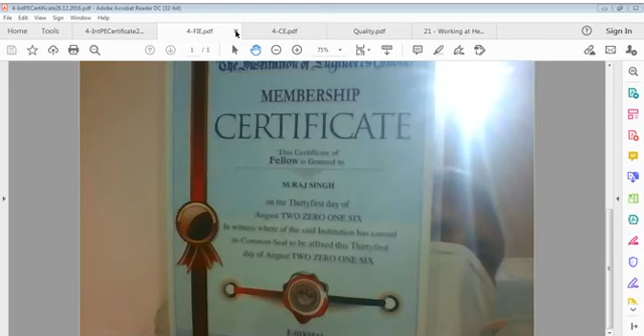Services delivered by that professional, or work done by that professional, must be professional, must be expert, must be reliable. That is a very important point. And what we actually expect from that professional is quality system, quality work.

Quality system and quality work are both related, because without system establishment, quality cannot be achieved, and without achieving quality, we cannot justify any system, we cannot justify any product. If a product lies short of quality, this means something wrong exists somewhere in the system we are working with, and this is a very serious matter.

Quality should be an integral part of product or services. This cannot be - quality cannot be isolated from the structure of the product, from the finishes of the product, from the processing of the product. Every stage of product delivery should be quality oriented.

That is the first requirement. During the process of manufacturing or construction, the product should be produced in an atmosphere, in an environment, that should be safety related - very much safe on its own, for its people, for health of the system, for health of workers, and for keeping the environment good, attractive, pro public, pro people.

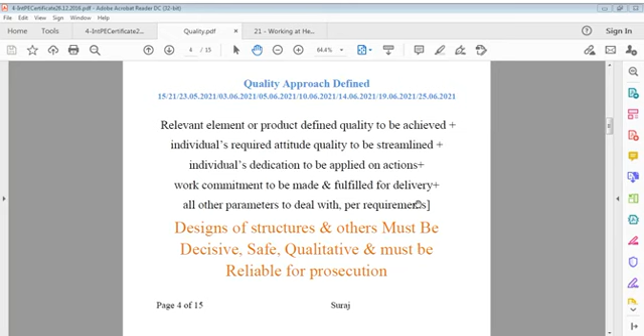A car which should work for at least 10 years - those products, if we worry about them, why don't we worry about those products which have to work for 50 to 100 years? That's the point here. Without quality, or can say without inbuilt quality into that product, you cannot say that it's going to last. So that's a very big question, a very big question. This must be considered by the engineering world and by the public.

You are going to spend millions and millions on your building, and you are not asking any question. It's really strange, and those manufacturers or promoters know it very well. They shall not raise this question because you are in need of a house and they are in need of money. That's it, this is the relation. Does your relation exist between money and your need, or do you spend money for a quality product? Or are you also interested in making business only, in doing business with them - buying this house or building and then disposing of it later on after making double profit.

Means market demand changes quality. If there's more demand, you shall change quality. No, it can't be accepted. Quality has to be maintained at required level. You cannot say, oh demand is more, I just made it very rapidly and you did not get that much quality. That's not reasonable. That cannot be accepted.

If you want to raise your production level, you have to raise resources. You cannot force your workers to work 20 hours or 18 hours a day. Maximum industrial standards don't allow more than 10 hours — 8 hours plus 2 hours overtime. In rare cases it can be more, but it's human that works, and machines also require maintenance, so continuous work is not possible. If you want to enhance your business and quantity, you have to raise the level of your resources. That's very clear.

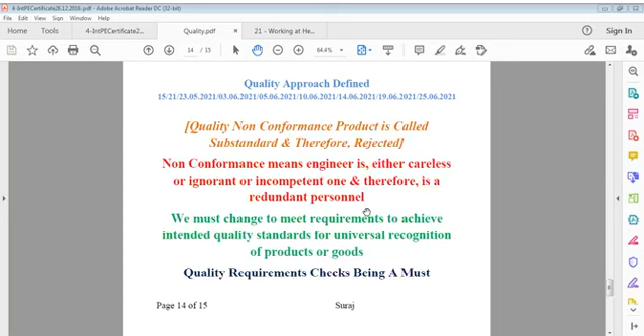Missing all this, we have to blame ourselves for quality failure. Reliability, though it's also some form of quality, is the quality of every act, of every sequence. The sum of that is reliability.

What level of reliability, what level of quality, what level of input — all of this can be defined, and quality means compliance to that requirement. It doesn't mean you bring stars from the sky or the sun or moon and say this is quality. Nobody shall demand gold if the requirement is iron. Whatever is required, requirement is design. The designer specifies what is required — it may be design specification, work specification, or material specification. Which material you have to use is most important, but use of material alone is not enough. How we have to use it, what factors to consider — all this counts in design.

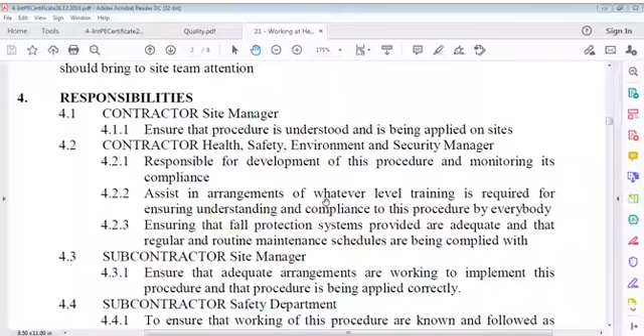We defined the scope, and talked on definitions of this requirement. Then we can see that we define various other positions — what they have to do on site or otherwise — and then we worked on the responsibilities. Then, because in heights there are so many hazards involved, working at heights, we talked of that.

We are somewhere, I think,

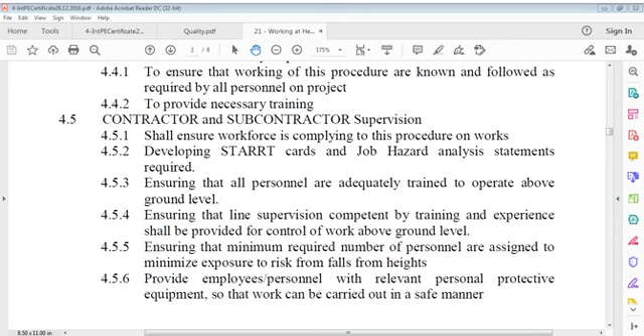Shall ensure work with subcontractor supervision, shall ensure workforce is complying to this procedure on works, developing STARRT cards and job hazard analysis or assessment statements required like that. Job hazard analysis, you know very well, and STARRT, this is safety task analysis, risk review technique, which is done in the beginning of activity.

And the card is given to everybody who can understand, particularly in mechanical and electrical, but it's also done in civil analysis, ensuring all personnel are adequately trained to operate above ground levels. They must be trained, and ensuring that line supervision competent by training and experience shall be provided for control of work above ground level. Ensuring the minimum required number of personnel are assigned to minimize exposure to risk from fall from height, because everybody cannot be allowed for that until one is well trained.

Provide employees personnel with relevant personal protective equipment so that work can be carried out in a safe manner. And ensuring edge protection is provided at possible locations where personnel could be susceptible to falls when working at height more than

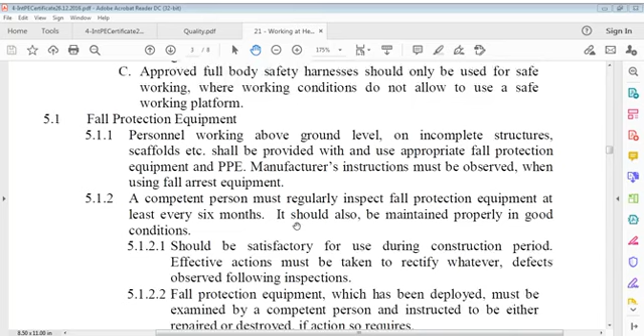And then fall protection equipment, which can say personnel working above ground level on incomplete structures, scaffolds, etc., shall be provided with and use appropriate fall protection. These points we have to be very careful about.

Well, I think last time working at, let me see if I can do it. I can find that. Yeah, there was some point, I think some file I retrieved from that. Last time we used this file for explanation.

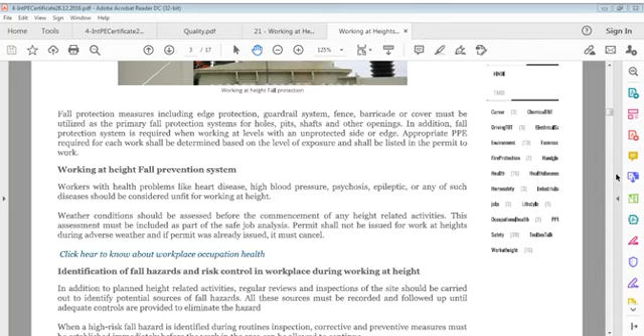Working at height, what was, and you can see these OSHA issues we talked of. Working at height procedure requirement we talked of, and then working at height fall prevention system, and we talked of identification of fall hazards and risk control in workplace.

Identification of fall hazards, I say, let me just blow it up further so that everybody can see it. Identification of fall hazards, risk control in workplace during working at height.

Working at height fall protection equipment we talked of: guardrail system, warning line system, safety full body harness, anchorage, connections and lifeline, and self-retracting lifeline, shock absorber, snap hook.

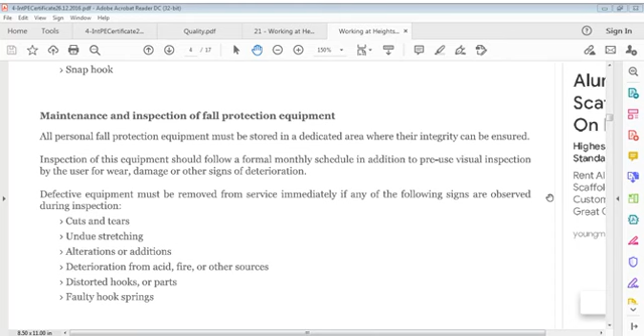Maintenance and inspection of fall protection equipment, like all personal fall protection equipment must be stored in a dedicated area where their integrity can be ensured. Inspection of this equipment should follow a formal monthly schedule in addition to pre-use visual inspections by the user for wear, damage, or other signs of deterioration, and defective equipment must be removed from service immediately if any of the following signs are observed, like cuts and tears, undue stretching, alteration, additions, deterioration from acid, fire or other sources, distorted hooks.

Likewise, this is how to keep this elevation safe, so that people should not fall. You can see this here. All these are the prevention of falls.

This is how many meters from here, from this level. And another one here for guardrail, like this guardrail and toe rail, toe guard. Likewise, it can be said that then you can say working at height guardrail systems. Permanent guardrails are often constructed as part of stairways.

We use them in homes, we call them railing here, and they are often constructed as part of stairways, landings, work platforms, and equipment access platforms.

Where short-term fall hazards exist, temporary guardrails are used. So we can say then working at heights, toolbox talks and warning monitors. Working at temporary warning - we should understand this point, meaning what is temporary warning and what is that?

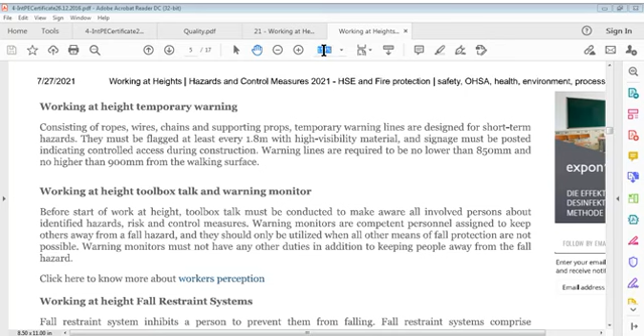Working at height, temporary warning consisting of ropes, wires, chains, and supporting props. Temporary warning lines are designed for short-term hazards. They must be flagged at least every 1.8 meters with high visibility material, and signage must be posted indicating controlled access during construction. Warning lines are required to be no lower than 850mm and no higher than 900mm from the walking surface. This is warning lines, so what is that?

Working at height, temporary warning consisting of ropes, wires, chains and supporting props. Temporary warning lines are designed for short-term hazards. They must be flagged every 1.8 meters with high visibility material, and signage must be posted indicating controlled access during construction. Warning lines are required to be no lower than 850mm and no higher than 900mm from the walking surface. Working at height, toolbox talk and warning monitor.

Before start of work at height, toolbox talks must be conducted to make all involved persons aware about identified hazards, risks and control measures. Warning monitors are competent personnel assigned to keep others away from fall hazards, and they should only be utilized when all other means of fall protection are not possible. Warning monitors must not have any other duty in addition to keeping people away from fall hazards. Then we have working at height fall restraint system.

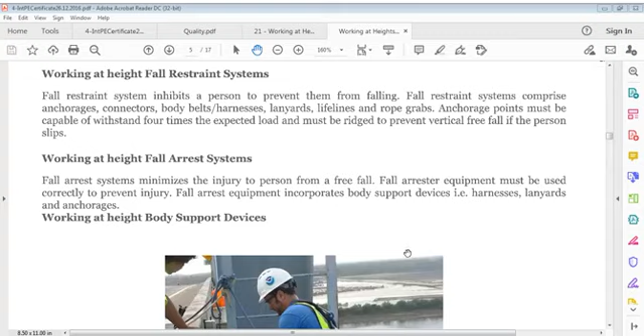Working at height fall arrest system we have - likewise, you can say we discuss all this. And we have working at height lanyards we talked of, lanyard hooks. First of this we go see this one. This is, you can say, it says there's a time limit also.

Let's say even after an individual is caught from a fall by a fall arrest system, that individual is not out of danger, that individual is in danger. Within 15 to 20 minutes, suspension from a harness causes blood to pool in the legs, eventually making the suspended individual pass out.

Non-circulating blood in the legs then loses oxygen and becomes toxic, a dangerous condition known as suspension trauma, also known as harness hang syndrome or orthostatic intolerance. To prevent suspension trauma, best practice is to utilize a body harness with suspension trauma straps that the individual can use to hook their feet into and push their body upwards, allowing their blood to continue circulating.

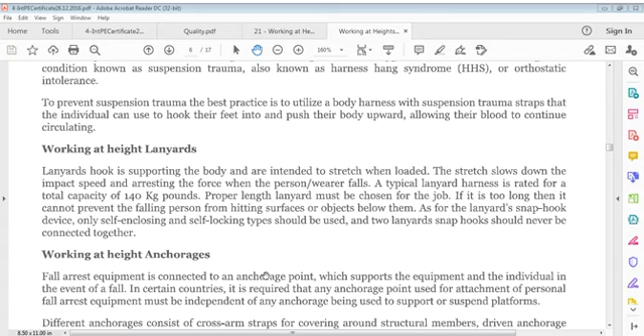Working at height lanyards also - it's something different, although I discuss this. A lanyard hook supports the body and is intended to stretch when loaded. Stretch slows down impact speed and arresting force when the person wearing it falls.

A typical lanyard harness is rated for a capacity of 140 kg. Proper length lanyards must be chosen for the job - if it's too long, then it cannot prevent the falling person from hitting surfaces or objects below. As far as lanyard snap hook devices, only self-enclosing and self-locking types should be used, and two lanyard snap hooks should never be connected together.

Then working at height anchorages we talked of. Fall arrest equipment is connected to an anchorage point which supports the equipment and individual in the event of a fall. In certain countries, it's required that the anchorage point used for attachment of personal fall arrest equipment must be independent of an anchorage being used to support a suspended platform.

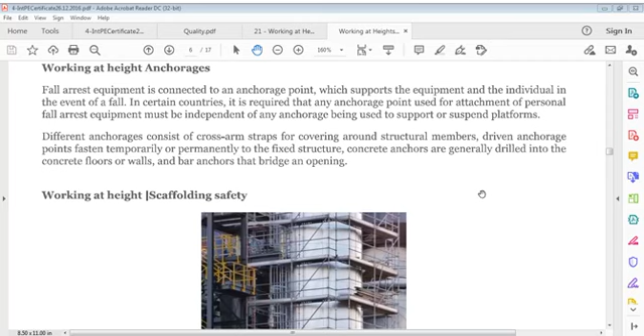Different anchorages consist of cross-arm straps for wrapping around structural members. Driven anchorage points are fastened temporarily or permanently to a fixed structure. Concrete anchors are generally drilled into concrete floors or walls, and bar anchors bridge an opening.

Working at height scaffolding system, this is that. It should be safe all around - no way should people fall from this. That is working at height scaffolding safety.

All types of scaffolding must be installed by a competent and certified professional. Scaffold must be completed in such a manner that falls to lower levels are prevented. This could be done by mounting handrails and kickboards, securing tools and other items, attaching safety nets if necessary, considering erecting barriers and signs, and using certified scaffolding only.

Scaffolding training, competency and supervision of working at height: scaffolding may only be erected by competent personnel. A trained person can say scaffolding may only be erected, maintained, altered or dismantled under strict personal supervision of a competent scaffolding supervisor who has been appointed in writing. Every scaffolder should be trained.

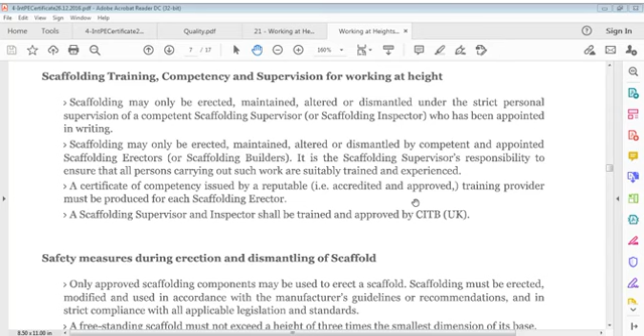Scaffolding may only be erected, maintained, altered and dismantled by competent and appointed scaffolding erectors. It's the scaffolding supervisor's responsibility to ensure that all persons carrying out such work are suitably trained and experienced, including safety measures during erection and dismantling of scaffold. This is also very important, because sometimes they throw things, and it's not right.

Only approved scaffolding components may be used to erect a scaffold. Scaffolding must be erected, modified and used in accordance with manufacturer's guidelines or recommendations, and in strict compliance with all applicable legislation and standards. A freestanding scaffold must not exceed a height of two times the smallest dimension of its base.

Scaffolds with a height to base width ratio of more than 3:1 must be restrained from tipping over by guying, tying, or bracing. Guy wires and ties prevent scaffolding from tipping away from the building or structure, and braces are rigid supports that prevent scaffolding from tipping into the building or structure.

The scaffolding must be secured to the structure every 6 meters vertically and every 9 meters horizontally as a minimum. Adequate underpinning, sills or footplates must be provided for scaffolds erected on filled or otherwise soft ground, including sand or gravel.

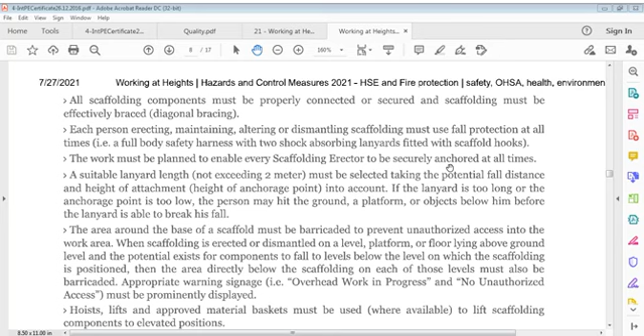Work must be planned to enable every scaffolding erector to be securely anchored at all times. A suitable lanyard length not exceeding 2 meters must be selected, taking the potential fall distance and height of the anchorage point into account. If the lanyard is too long or the anchorage point is too low, the person may hit the ground, a platform, or objects below him before the lanyard is able to break his fall.

The area around the base of the scaffold must be barricaded to prevent unauthorized access into the work area. When scaffolding is erected or dismantled on a level platform or floor above ground level, with potential for components to fall to levels below, the area directly below the scaffolding on each of those levels must also be barricaded. Appropriate warning signage, such as 'overhead work in progress' and 'no unauthorized access,' must be prominently displayed.

Hoists, lifts and approved material baskets must be used where available to lift scaffolding components to elevated positions.

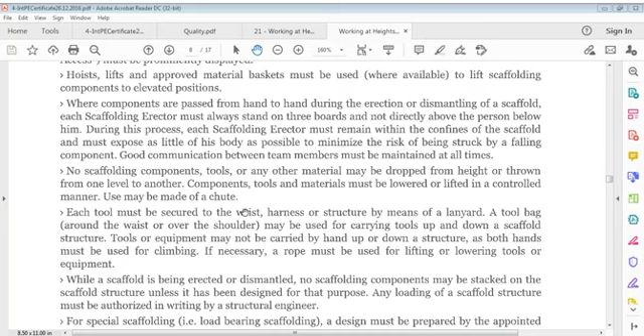Good communication between team members must be maintained at all times.

Now, I think I have to leave for some time. Let me see what's the status here. I'll check because it's a very important point. Let me see the position of the rain. There's no voice, let me check. I'll be back, just a minute please. Let me see the status of the rain because I have to go to the terrace.

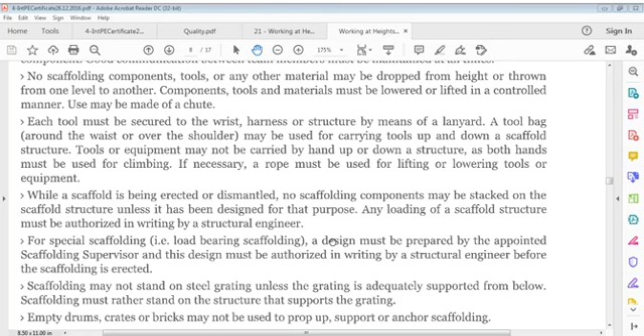Each tool must be secured to wrist, harness or structure by means of a lanyard. A tool bag around the waist or over the shoulder may be used for carrying tools up and down a scaffold structure. Tools or equipment may not be carried by hand up or down a structure, as both hands must be used for climbing. If necessary, a rope must be used for lifting or lowering tools or equipment.

While a scaffold is being erected or dismantled, no scaffolding components may be stacked on the scaffold structure unless it has been designed for that purpose. Any loading of a scaffold structure must be authorized in writing by a structural engineer. For special scaffolding, that is load-bearing scaffolding, a design must be prepared by the appointed scaffolding supervisor, and this design must be authorized in writing by a structural engineer before scaffolding is erected.

Scaffolding may not stand on steel grating unless the grating is adequately supported from below. Scaffolding must rather stand on a structure that supports the grating.

Empty drums, crates or bricks may not be used to prop up, support or anchor a scaffold.

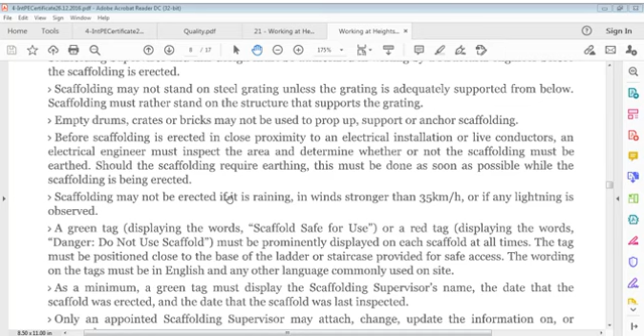A green tag displaying the words 'scaffold safe for use', or a red tag displaying the word 'danger, do not use scaffold', must be prominently displayed on each scaffold at all times. The tag must be positioned close to the base of a ladder or staircase provided for safe access. Wording on the tag must be in English and any other language is commonly used on site. As a minimum, a green tag must display the scaffolding supervisor's name, the date the scaffold was erected, and the date the scaffold was inspected. Only an appointed scaffolding supervisor may attach, change, update information on, or remove these tags.

Precautions during special conditions for leaving an unattended, unsafe scaffold: the scaffold must not be left partially erected or partially dismantled except for normal working stoppages, for example over weekends, and then at the very least the scaffolding must be adequately braced to ensure that it is safe.

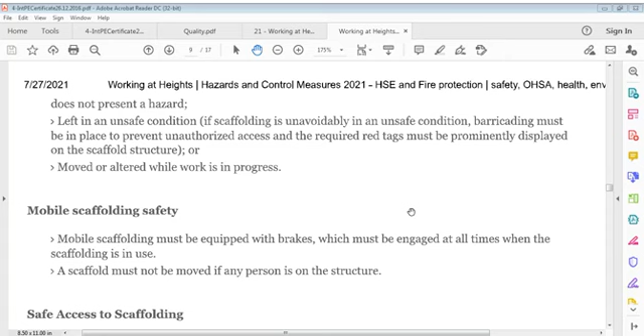Mobile scaffold safety. Mobile scaffolding must be equipped with brakes which must be engaged at all times when the scaffolding is used. A scaffold must not be moved if any person is on the structure.

Safe access to scaffolding. Safe and convenient access must be provided to every scaffold platform by means of properly installed ladders or approved stairways, which must remain unobstructed at all times. Climbing up or down a scaffold on braces or ledgers is forbidden.

All ladders used to access a scaffolding must be securely attached to the scaffold structure. Hook-on and attachable ladders must be specifically designed for use with the type of scaffolding being used.

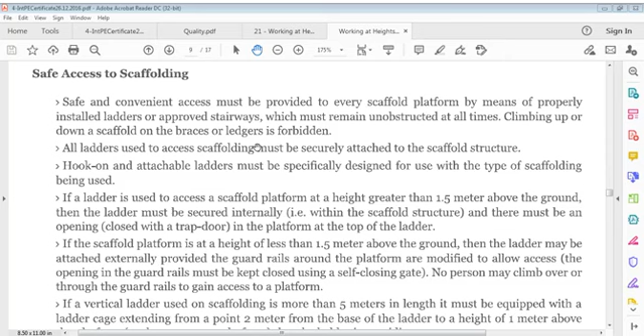If a ladder is used to access a scaffold platform at a height greater than 1.5 meters above ground, the ladder must be secured internally, within the scaffold structure, and there must be an opening closed with a trapdoor in the platform at the top of the ladder. If the scaffold platform is at a height of less than 1.5 meters above ground, the ladder may be attached externally provided guardrails around the platform are modified to allow access.

The opening in the guardrails must be kept closed with a self-closing gate. No person may climb over or through the guardrails to gain access to the platform.

If a vertical ladder used on scaffolding is more than 5 meters in length, it must be equipped with a ladder cage extending from a point 2 meters from the base of the ladder to a height of 1 meter above the platform, or uppermost platform, that the ladder is providing access to.

Circular ladder cages must have an internal diameter of not more than 700 mm. Square ladder cages must have internal dimensions of no more than 700 mm by 700 mm.

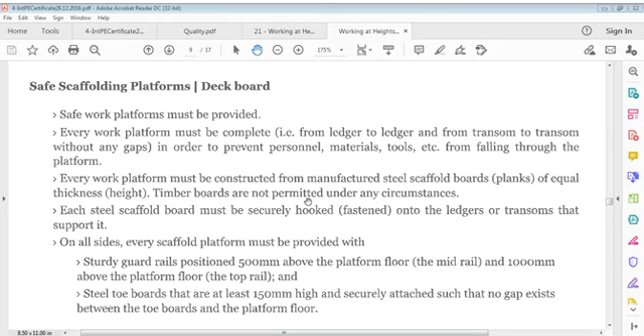This is in order to prevent personnel, materials, tools, etc. from falling through the platform. Every work platform must be constructed from manufactured steel scaffold boards or planks of equal thickness and height. Timber boards are not permitted under any circumstances.

Each steel scaffold board must be securely hooked and fastened onto the ledgers or transoms that support it. On all sides, every scaffold platform must be provided with sturdy guardrails.

Sturdy guardrails positioned 500 mm above the platform floor as a mid-rail, and 1000 mm above the platform floor as a top rail, along with steel toe boards that are 150 mm high and securely attached such that no gap exists between the toe boards and the platform floor.

Wire mesh infill panels incorporating a toe board may be used instead of a mid-rail.

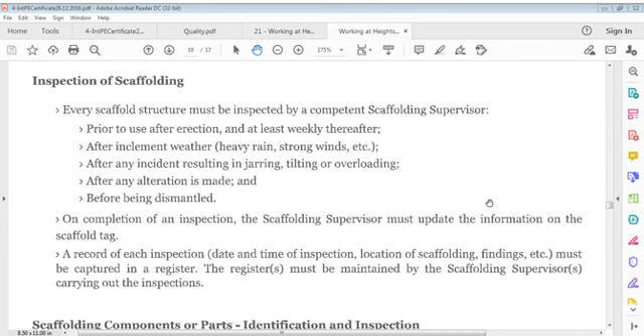On completion of an inspection, the scaffolding supervisor must update information on the scaffold tag. A record of each inspection, including date and time of inspection, location of scaffolding, and findings, must be captured in a register. Registers must be maintained by the scaffolding supervisor carrying out inspections.

Scaffolding components, parts identification, and inspection. All scaffolding components belonging to a contractor must be properly marked or uniquely colored to enable positive identification.

Prior to erecting a scaffold, all scaffolding components must be carefully inspected by a competent scaffolding supervisor. Components found to be defective during an inspection must be conspicuously marked and removed to a suitably demarcated quarantine area for destruction, repair, refurbishment, or removal from site. Deformed and bent wedges must be straightened and inspected for cracks before being put back into service.

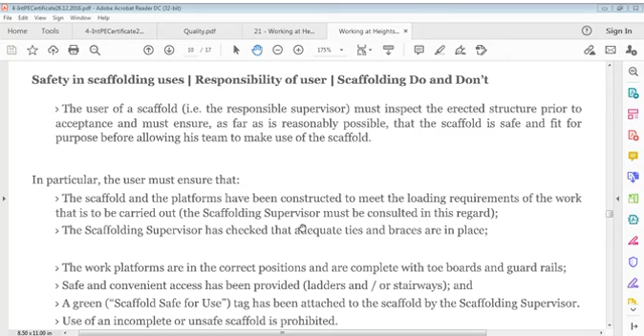In particular, the user must ensure that the scaffold and platforms have been constructed to meet the loading requirements of the work to be carried out. The scaffolding supervisor must be consulted in this regard.

The scaffolding supervisor has checked that adequate ties and braces are in place, and that work platforms are in correct positions and complete with toe boards and guardrails.

Work platforms are in correct positions and complete with toe boards and guardrails. Safe and convenient access has been provided, using ladders or stairways.

A green 'scaffold safe for use' tag has been attached to the scaffold by the scaffolding supervisor. Use of an incomplete or unsafe scaffold is prohibited.

Unsteady or non-rigid scaffolds must not be used, and any inadequacies must be reported to, and rectified by, the responsible scaffolding supervisor.

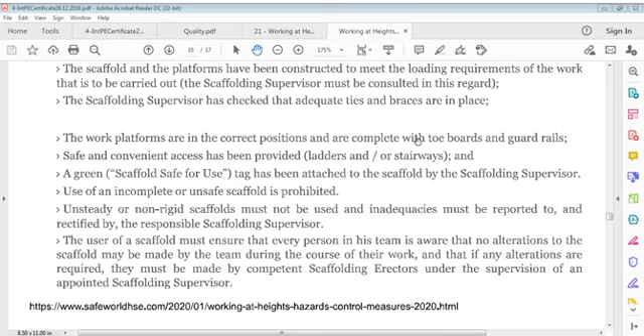The user of a scaffold must ensure that every person on his team is aware that no alterations to the scaffold may be made by the team during the course of their work. If alterations are required, they must be made by competent scaffolding erectors under the supervision of an appointed scaffolding supervisor.

A scaffold may not be used if a red tag is displayed, indicating that it is not safe to use, during inclement weather, defined as wind speeds greater than 40 km per hour, thunderstorms, or heavy rain.

The area around the base of a scaffold must be appropriately barricaded to prevent unauthorized access into the work area, and appropriate warning signs must be prominently displayed.

Loose tools and/or materials on scaffold platforms must be secured using lanyards, wire, or fiber rope, or placed in secured containers. Where appropriate, catch nets may be installed as an additional safety measure to prevent materials or tools from falling to the ground.

Storage or placement of materials on scaffolding platforms must be kept to a minimum. Debris, as well as tools and materials no longer required, must be removed from all working platforms at least once per day. Scaffolding platforms must be cleaned regularly.

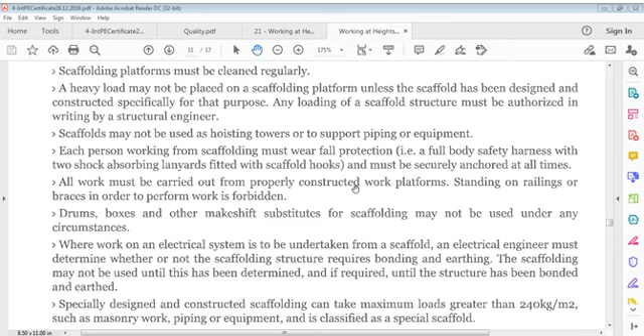Each person working from scaffolding must wear fall protection, that is a full body safety harness with two shock absorbing lanyards with scaffold hooks, and must be securely anchored at all times.

All work must be carried out from properly constructed work platforms. Standing on railings or braces in order to perform work is forbidden.

All work must be carried out from properly constructed work platforms. Standing on railings or braces to perform work is forbidden. Drums, boxes, and other makeshift substitutes for scaffolding may not be used under any circumstances.

Where work on an electrical system is to be undertaken from a scaffold, an electrical engineer must determine whether the scaffolding structure requires bonding and earthing. The scaffold may not be used until this has been determined, and if required, until the structure has been bonded and earthed.

Specially designed and constructed scaffolding can take maximum loads greater than 240 kg per square meter, such as for masonry work, piping, or equipment, and is classified as a special scaffold.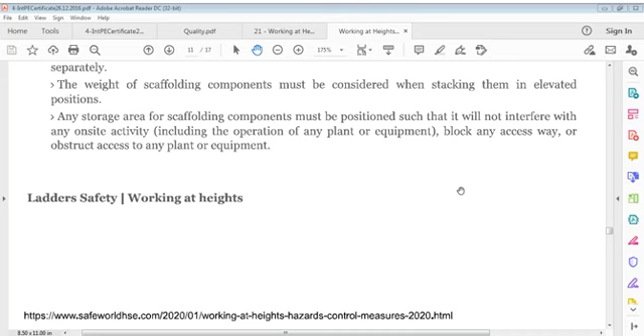Storage areas for scaffolding components must be positioned such that they do not interfere with on-site activity, including the operation of any plant or equipment, and must not block any access way or obstruct access to any plant or equipment.

Ladder safety. Working at heights: hazards and control measures. Ladder safety.

Ladders may be used for carrying out simple jobs, however, with approval, adequate controls and supervision by experienced personnel. Ladders, when approved for use, must always be secured to ensure they do not slip during operation, and they must be laid flat on identified storage area when not in use.

Portable ladder safety, portable ladders, hazards and risk control. A formal and documented risk assessment must show that no practical alternatives exist before a ladder can be used. A good handhold must be available at all times.

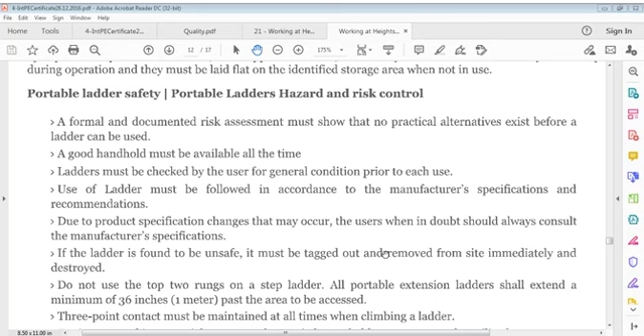Ladders must be checked by user for general condition prior to each use. Use of ladder must be followed in accordance to manufacturer's specifications and recommendations. Due to product specification changes that may occur, users, when in doubt, should always consult manufacturer's specifications. If a ladder is found to be unsafe, it must be tagged out and removed from site immediately and destroyed.

Do not use the top two rungs on a step ladder. All portable extension ladders shall extend a minimum of 36 inches or 1 meter past the area to be accessed. 3-point contact must be maintained at all times when climbing a ladder. Equipment and/or materials must not be carried up a ladder; a rope may be utilized to transport equipment and/or material.

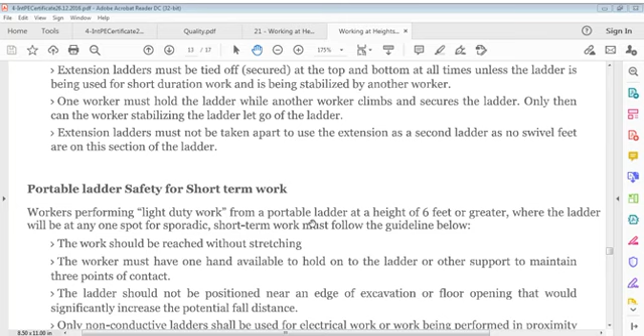What does it mean? It says extension ladders must be tied off, secured at top and bottom at all times, unless the ladder is being used for short duration work and is being stabilized by another worker. One worker must hold the ladder while the other worker climbs and secures it. Only then can the worker stabilizing the ladder let go of it.

Extension ladders must not be taken apart to use the extension as a second ladder, as no swivel feet are on this section of the ladder. Portable ladder safety for short-term work.

Workers performing light duty work from a portable ladder at a height of 6 feet or greater, or 2 meters, where the ladder shall be at any one spot for sporadic short-term work, must follow the guidelines below. Work should be reached without stretching.

It says: while workers performing light duty work from a portable ladder at a height of 2 meters or greater, where the ladder will be at any one spot for sporadic short-term work, must follow the guidelines as follows. Work should be reached without stretching. The worker must have one hand available to hold on to the ladder or other support to maintain 3 points of contact. The ladder should not be positioned near an edge of excavation or floor opening that would significantly increase potential fall distance.

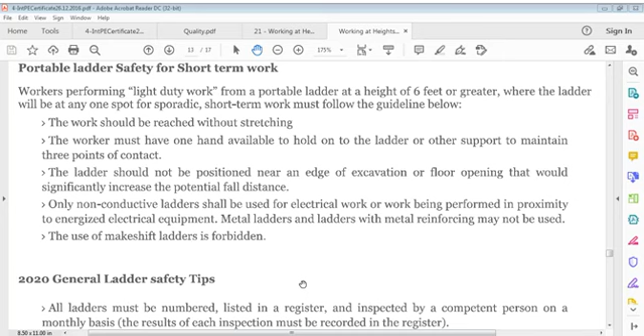Only non-conductive ladders shall be used for electrical work - non-conductive, not conductive, because it's electrical - or work being performed in proximity to energized electrical equipment. Metal ladders and ladders with metal reinforcement may not be used. Use of makeshift ladders is forbidden.

General ladder safety tips: all ladders must be numbered, listed in a register, and inspected by a competent person on a monthly basis.

Results of each inspection must be recorded in the register. Before using a ladder, the user must inspect it for damage.

Ladders with missing, broken, cracked or loose rungs, split stiles, missing or broken spreaders on step ladders, or any other form of damage or defect must not be used. A damaged ladder must be removed from service and tagged out of service without delay, and must then either be repaired if possible or destroyed to prevent further use.

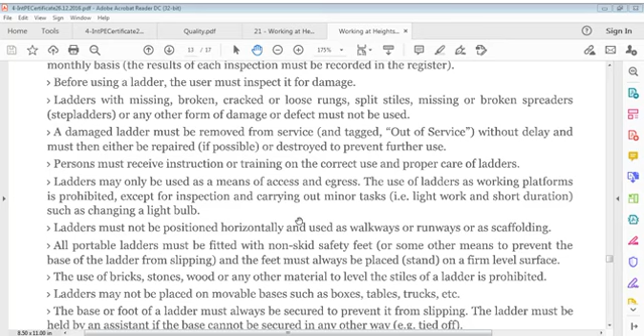Ladders must not be positioned horizontally and used as walkways, runways, or as scaffolding. All portable ladders must be fitted with non-skid safety feet or some other means to prevent the base from slipping, and feet must always be placed on a firm, level surface. Use of bricks, stones, wood, or other material to level the stiles of a ladder is prohibited.

Ladders may not be placed on movable bases such as boxes, tables, trucks, etc. The base or foot of a ladder must always be secured to prevent it from slipping. The ladder must be held by an assistant if the base cannot be secured in any other way.

A straight ladder must extend at least 1 meter beyond its support, or above the working platform it provides access to. The top of the ladder must be tied off or otherwise secured to its support to prevent accidental movement.

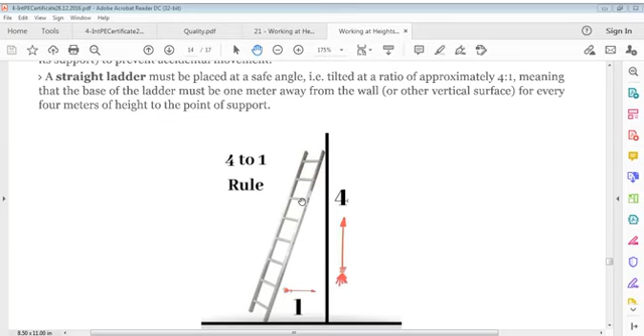A straight ladder must be placed at a safe angle, tilted to a ratio of approximately 4:1, meaning that the base of the ladder must be 1 meter away from the wall or other vertical surface for every 4 meters of height to the point of support.

A step ladder may never be used as a straight ladder. A step ladder must be opened fully and its spreaders must be locked securely.

When using an extension ladder, at least 4 rungs must always overlap at the center of the ladder. Ladders may not be joined together unless they have been specifically designed and manufactured for that purpose.

A suspended ladder, that is one not standing on a base, must be attached in a secure manner to prevent undue swinging or swaying and to ensure that it cannot be displaced.

A ladder may not be placed against a window, glass, or any other material which is unlikely to withstand the force exerted on it by the top of the ladder.

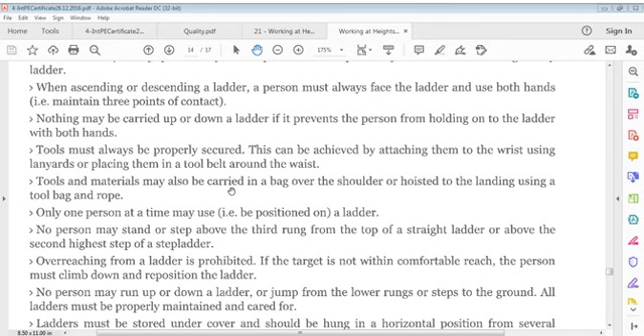This can be achieved by attaching tools to the wrist using lanyards or placing them in a tool belt around the waist. Tools and materials may also be carried in a bag over the shoulder or hoisted to the landing using a tool bag and rope. Only one person at a time may use, that is be positioned on, a ladder.

No person may stand or step above the third rung from the top of a straight ladder, or above the second highest step of a step ladder.

Overreaching from a ladder is prohibited if the target is not within comfortable reach. The person must climb down and reposition the ladder.

No person may run up or down a ladder or jump from lower rungs or steps to the ground.

All ladders must be properly maintained and cared for. Ladders must be stored under cover and should be hung in a horizontal position from several brackets. No ladder may be left lying on the ground or exposed to weather. A ladder left lying on the ground presents a tripping hazard and may be damaged by vehicles running over it.

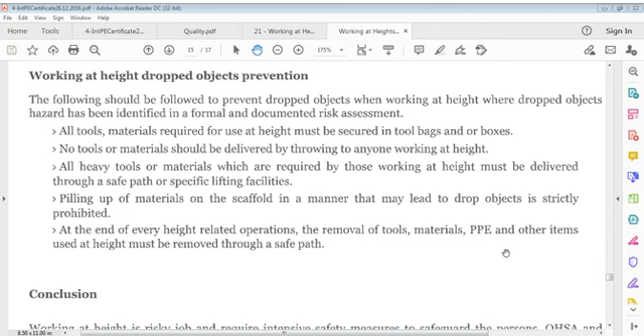Working at height is a risky job and requires intensive safety measures to safeguard persons. OSHA, the Occupational Safety and Health Administration, and the National Safety Council NSC declared that most accidents occurred worldwide due to failure in fall prevention standards.

These incidents alert employers to assure safety measures while working at height by ensuring the best safety standards in the workplace, namely: safe scaffolding, safe ladders, edge fall protections, lifeline, full body harness, hazard identification, risk assessment or risk management, supervision, and engaging competent workmen or persons.

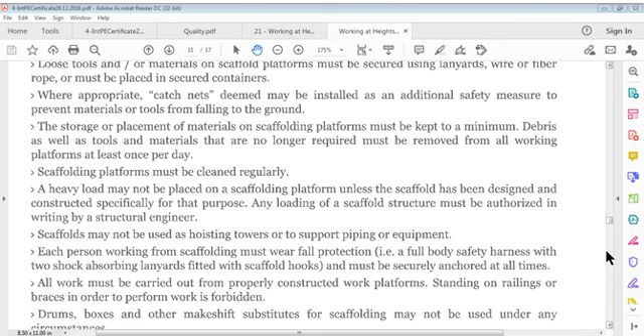So we have got here a talk on working at height, scaffolding it was, and we have talked about that, we have talked about all this. That is its position of rain, it's very important for me. I think it's raining now, again it's raining. This is the problem, difficult for me to work in the rain.

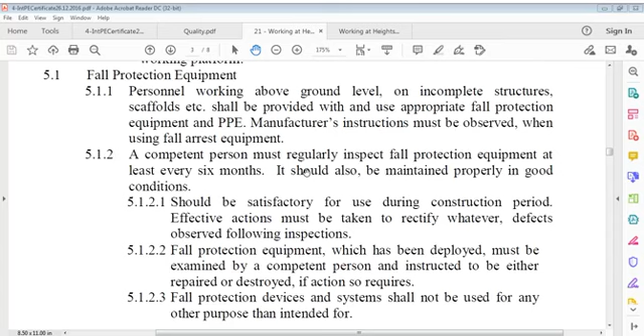Rain and rain, it's the problem now. Well, what to do, beyond my control. Working at heights, we have discussed, and this was, I think, good interest for everybody. And now we'll go to our talks that we are interested in. I think I should close this file probably.

We have this talk with us. I started with the purpose of this: a procedure applies to all personnel employed on project shall be applied at locations where work is carried out at elevations in excess of 2 meters above ground level or grade level. The purpose of this procedure is to provide guidelines on measures to be taken for personnel working at height.

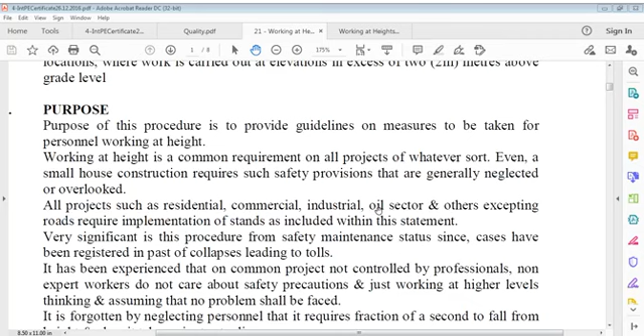Working at height is a common requirement on all projects of whatever sort. Even a small house construction requires such safety provisions that are generally neglected and overlooked. So you can say the purpose of this procedure is to provide guidelines on measures to be taken for personnel working at height.

All projects such as residential, commercial, industrial, oil sector or others, excepting roads, require implementation of standards as included within this statement.

This procedure is very significant from a safety maintenance status, since cases have been registered in the past of collapse leading to tolls. It has been experienced that on common projects not controlled by professionals, non-expert workers do not care about safety precautions, just working at higher levels, thinking and assuming that no problem shall be faced.

It's forgotten by neglecting personnel that it requires a fraction of a second to fall from height, and also it takes minutes to die. Got it? Now certain definitions we'll talk of.

Safety means safety, health and environment discipline to support project activities. Company means an organization carrying out prosecution of project, and contractor means organization that has won that project, subcontractor, client, etc. Training means training imparted for specific safety topic on job or on project site. Management means organization, top, middle and other.

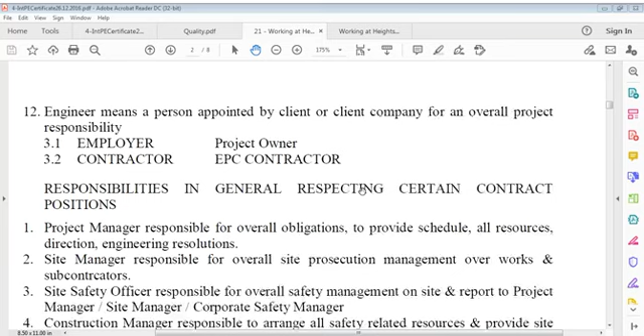We go to project manager, site manager, site safety, etc., and all that similar, repetitive responsibilities. Working of this procedure should be known to everybody.

Workforce complies with this procedure on works, and developing STARRT cards and job hazard assessment or analysis statements. All personnel to be adequately trained to operate above ground levels, ensuring line supervision is competent by training and experience, provided for control of work above ground level, ensuring minimum required number of personnel are assigned to minimize exposure to risk from falls, and provide personnel with relevant personal protective equipment so work can be carried out in a safe manner.

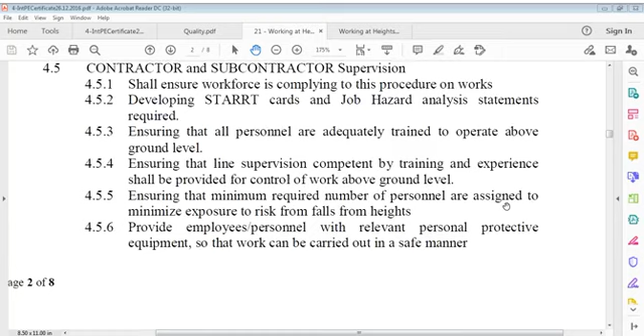Ensuring edge protection is provided at possible locations where personnel could be susceptible to fall when working at height more than 2 meters, and ensuring personnel in vicinity of above ground work are not subject to risk of falling objects. Both contractor and subcontractor, structural steel superintendents, shall ensure that no work is carried out on structural steel until it has been made safe with gratings, handrails, kick plates in position, per overall structure and instructions.

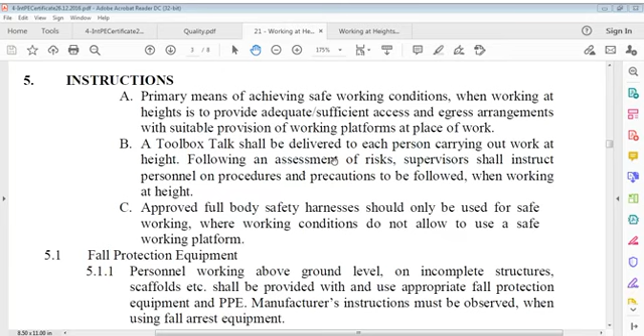A toolbox talk shall be delivered to each person carrying out work at height. Following an assessment of risks, supervisors shall instruct personnel on procedures and precautions to be followed when working at height. Approved full body safety harness should only be used for safe working where conditions do not allow use of a safe working platform.

Fall protection equipment: personnel working above ground level on incomplete structures, scaffolds, etc., shall be provided with and use appropriate fall protection equipment and personal protective equipment.

Manufacturer's instructions must be observed and complied with when using fall arrest equipment. A competent person must regularly inspect fall protection equipment at least every 6 months. It should also be maintained properly in good condition.

It should be satisfactory for use during the construction period. Effective actions must be taken to rectify whatever defects are observed following inspections. Fall protection equipment which has been deployed must be examined by a competent person and instructed to be either repaired or destroyed if action so requires. Fall protection devices and systems shall not be used for any other purpose than what it is intended for.

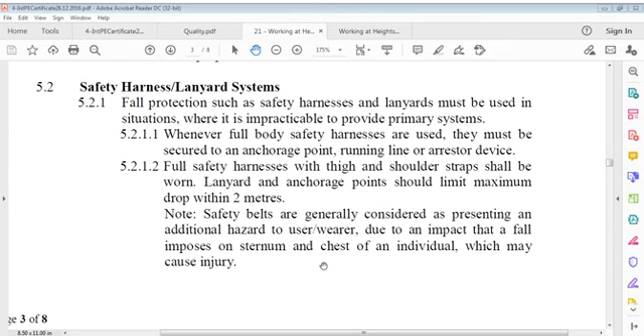Note: safety belts are generally considered as presenting an additional hazard to the user or wearer due to an impact that a fall imposes on the sternum and chest of an individual, which may cause injury.

Shock absorbers should be provided with the harness system in order to reduce shock impact loading in the event of a fall.

Running lines: running line systems can be used to provide a secure anchorage point for safety harnesses. Running lines should only be installed and maintained by competent persons. These systems must be designed for the loads which lines are expected to sustain. Lines must be supported on anchorages that are sufficiently strong, securely fixed to these anchorages, and of sufficient size and strength to support a falling person or persons.

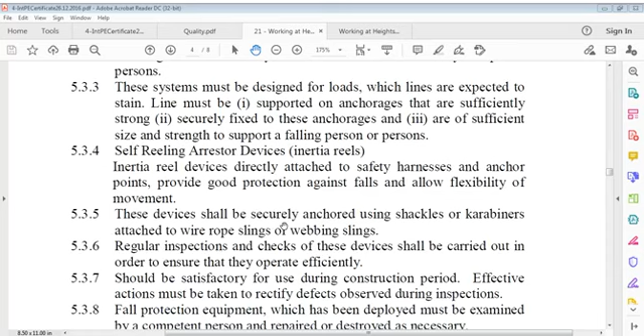Self-reeling arrestor devices, inertia reels: inertia reel devices directly attached to safety harnesses and anchor points provide good protection against fall and allow flexibility of movement.

Inertia reel devices directly attached to safety harnesses and anchorage points provide good protection against falls and allow flexibility of movement. These devices shall be securely anchored using shackles or karabiners attached to wire rope, slings or webbing slings.

Regular inspections and checks of these devices shall be carried out in order to ensure that they operate efficiently and should be satisfactory for use during the construction period. Effective actions must be taken to rectify defects observed during inspections. Fall protection equipment which has been deployed must be examined by a competent person and repaired or destroyed as necessary. Fall protection devices and systems shall not be used for any other purpose than intended for.

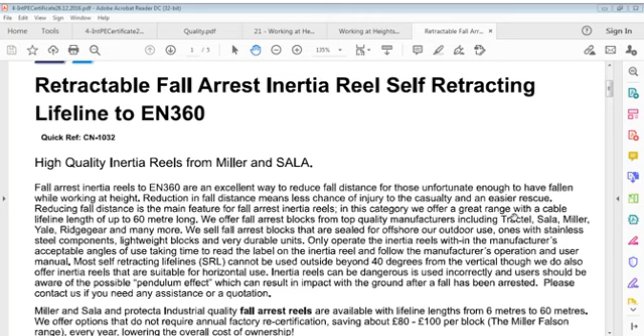Retractable fall arrest inertia reel self-retracting line to EN360. This is a retractable fall arrest inertia reel self-retracting lifeline. Lifting safety fall arrest inertia blocks to EN360, category fall arrest inertia blocks to EN360-2044. This is that one - fall arrest retractable inertial reel blocks, self-retracting lifeline to EN360. These are the devices I'm trying to show you.

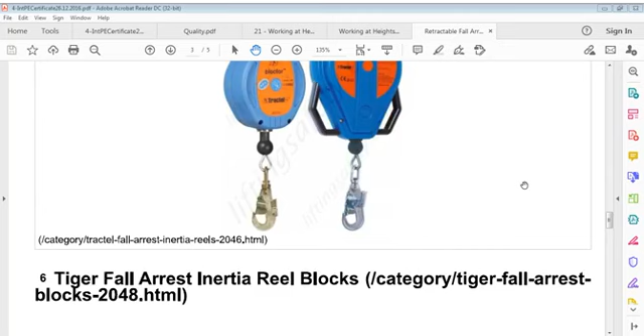So we go one by one here. Let me first save it so that it works well. That's okay. What's that now? We'll see - I think one is enough. Let's take this down and let's see something else here. What is a self-retracting lanyard? It's too old, so I'll close this - it's okay. It's this one, lifting safety retractable fall arrest device, high quality inertia reels from Miller and Sala.

Fall arrest inertia reels to EN360 are an excellent way to reduce fall distance for those unfortunate enough to have fallen while working at height. Reduction in fall distance means less chance of injury to casualty and an easier rescue - reducing fall distance is the main feature of fall arrest inertia reels. In this category, we offer a great range with a cable lifeline length up to 60 meters long.

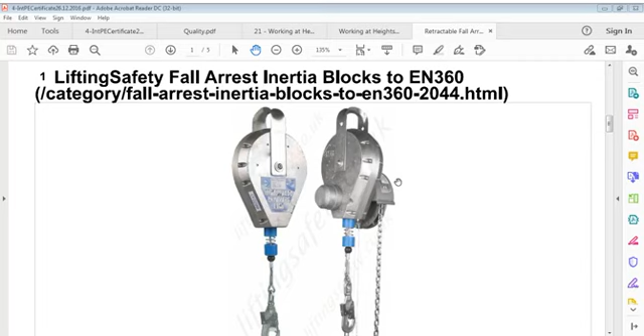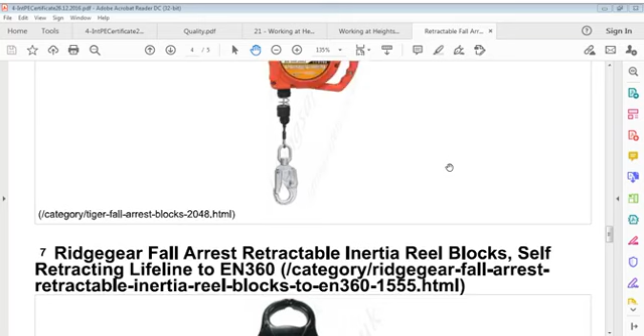A Miller fall arrest retractable inertia reel block. Honeywell Falcon this is, and then we can say Sala fall arrest retractable inertia block. Then Rebel, which is then Tractel fall arrest inertia reel self-retracting lifeline, also EN360. Tiger fall arrest inertia reel block. Ridgegear fall arrest retractable inertia reel block. Yale fall arrest retractable inertia reel block, self-retracting lifeline.

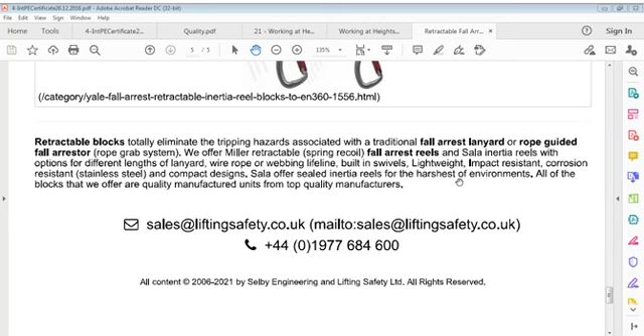Retractable blocks totally eliminate tripping hazards associated with traditional fall arrest lanyard or rope guided fall arrestor. Rope grab system we offer - okay, leave it also, I'm not interested in what they offer.

So this was - I just tried to show you what is this fall arrest, fall arrest something. It's better to understand only.

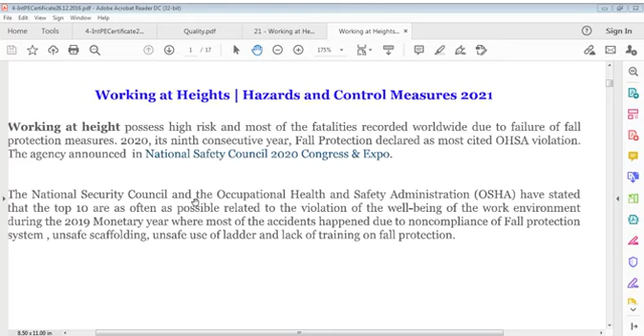Alright, now working at heights possesses high risk, and most fatalities recorded worldwide are due to failure of fall protection measures. Its ninth consecutive year, fall protection was declared by the National Safety Council, and the Occupational Health and Safety Administration (OSHA) have stated that the top 10 often cited violations relate to fall protection and well-being. Okay, we'll leave it now.

Come on to our point - I'll also close this because there's no use of this now. It was self-reeling arrest devices which are also called inertia reels.

Inertia reel devices directly attached to safety harnesses and anchor points provide good protection against falls and allow flexibility of movement. These devices shall be securely anchored using shackles and carabiners attached to wire rope slings or webbing slings. Regular inspections and checks of these devices shall be carried out in order to ensure that they operate efficiently, and should be satisfactory for use during the construction period.

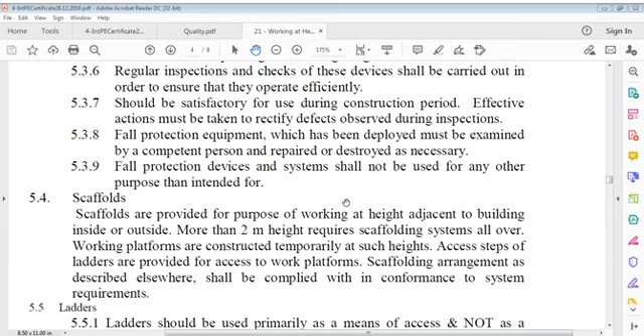Effective action must be taken to rectify defects observed during inspections. Fall protection equipment which has been deployed must be examined by a competent person and repaired or destroyed as necessary. Fall protection devices and systems shall not be used for any other purpose. Scaffolds.

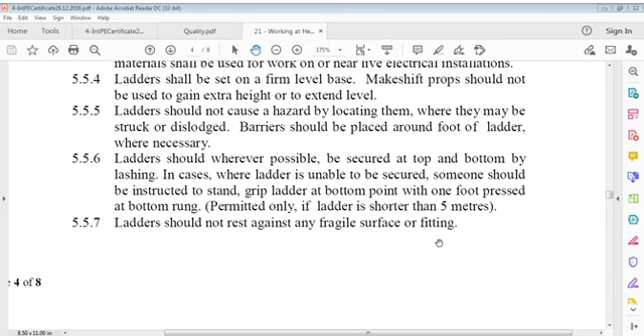The ladder should, wherever possible, be secured at top and bottom by lashing. In cases where the ladder is unable to be secured, someone should be instructed to stand and grip the ladder at the bottom point with one foot pressed at the bottom rung. This is permitted only if the ladder is shorter than 5 meters. The ladder should not rest against any fragile surface or fittings.

Ladders must extend to at least 1.05 meters, and must extend to 1.25 meters above the landing level unless some other suitable handhold is available. Both hands must be free when ascending or descending from the ladder. Tools and materials should be carried using either a suitable shoulder bag or belt, or be hoisted up the ladder.

Ladders should be pitched at a 1:4 incline, that is 75 degrees to horizontal. Personnel using ladders must be trained and instructed in the hazards associated with their use and the measures to be adopted to prevent ladder accidents.

Temporary elevated work platforms and walkways, namely those constructed from lightweight staging, must be adequately supported and secured in order to prevent undue movement. Edge guard protection must be provided on temporary work platforms and walkways.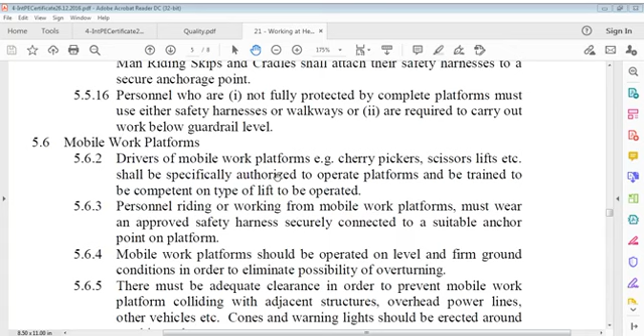Mobile work platform. Drivers of mobile work platforms, cherry pickers, scissor lifts, etc. shall be specifically authorized to operate the platforms and be trained to be competent on the type of lift to be operated.

Personnel riding or working from mobile work platforms must wear an approved safety harness securely connected to a suitable anchor point on the platform. Mobile work platforms should be operated on level and firm ground conditions in order to eliminate the possibility of overturning. There must be adequate clearance on the ground to prevent the mobile work platform from colliding with adjacent structures, overhead power lines, other vehicles, etc. Cones and warning lights should be erected around the machine where necessary.

A competent person should regularly conduct inspections and maintenance on mobile work platforms. Safe working loads and the permitted number of persons on the platform must not exceed what is indicated. Mast climbing work platform. This was mobile work platform. Let us see.

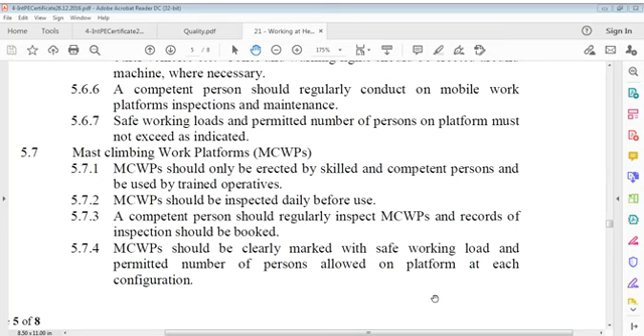Cherry pickers, scissor lifts, etc. Cherry pickers and scissor lifts, as we are saying. Cherry pickers, there are some cherry pickers. Scissor lift we will talk of. Let us see scissor lift.

I think it's not working at all. It's not working that way I thought. It's not taking that. No, it's not taking. I'm sorry, it's not taking.

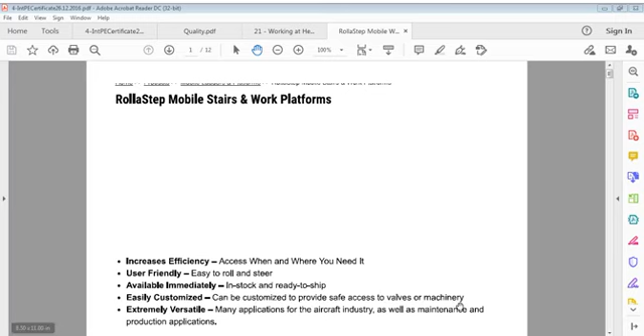So I'll only depend on this small page. This is what it shows. Safe Rack offer. Safe Rack offers RollaStep mobile platforms and stairs. Mobile platform stairs is...

G series is another one. VR series is another one. MP series another one. C series, easily customized mobile cantilever work platform. Cantilever work platform, stability meets mobility, adjustable heights, and this is just I want to show you this one. That one will go further, just to know what we're talking about, and that's an important point.

So it's a mobile working platform. So we talked of mobile working platforms, and now mast climbing work platforms.

Mast climbing work platform should only be erected by skilled and competent persons and be used by trained operators.

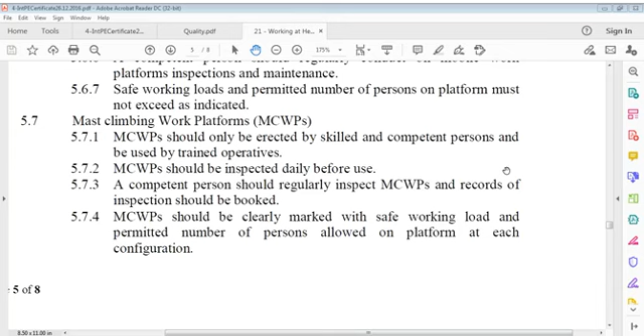MCWP or mast climbing work platform must be clearly marked with safe working load and permitted number of persons allowed on platform at each configuration.

Operators should not carry out repairs and adjustments to the mast climbing working platform unless qualified and authorized to do so.

Safe means of access to platform should be provided at its lowest level. This may be done by a short fixed ladder, a raised platform, or by control arrangements which allow platforms to be brought down to ground level.

Ground conditions must be checked for adequate bearing. A safety barrier must be erected around to exclude personnel from the area below the platform.

Personnel carriers, a skip or cradle used for man lifting must conform with the following requirements. These are personal carriers.

Safe working load should be clearly marked on the skip or cradle, together with the maximum number of persons it can carry.

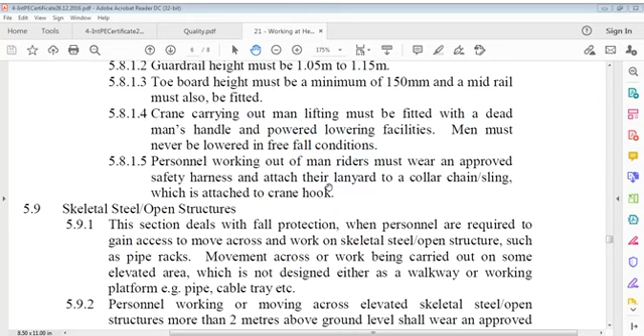Personnel working out of man riders must wear an approved safety harness and attach their lanyards to a collar, chain or sling which is attached to the crane hook. Skeletal steel open structures.

This section deals with fall protection when personnel are required to gain access to, move across and work on skeletal steel open structures such as pipe racks, movement across open structures such as pipe racks, or work being carried out on some elevated area which is not designed either as a walkway or working platform, such as pipe or cable tray etc.

Open structures, fall protection. This section deals with fall protection when personnel are required to gain access to, move across and work on skeletal steel open structures such as pipe racks, movement across or work being carried out on some elevated area which is not designed either as a walkway or working platform, namely pipe, cable tray, etc.

Personnel working or moving across elevated skeletal steel open structures more than 2 meters above ground level shall wear an approved safety harness and secure their lanyards either to suitable fall arrest equipment or the structure itself.

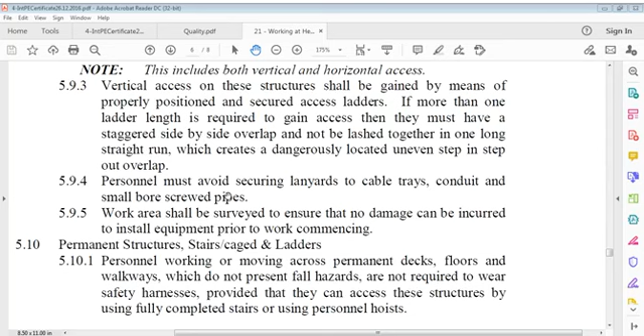Personnel must avoid securing lanyards to cable trays, conduit and small bore screwed pipes. The work area shall be surveyed to ensure that no damage can be incurred to installed equipment prior to work commencing.

Permanent structures, stairs and ladders. Personnel working or moving across permanent decks, floors and walkways which do not present fall hazards are not required to wear safety harnesses, provided that they can access these structures by using fully completed stairs or using personnel hoists.

Personnel working or moving across incomplete structures prone to risk of falling from more than 2 meters height must wear and use approved safety harnesses attached to fall arrest equipment on the structure.

Temporary or permanent guardrails and floor covers shall be installed as soon as possible in order to eliminate risk of falling. Only authorized and competent personnel shall work from incomplete structures on installation duty with provided fall arrest measures.

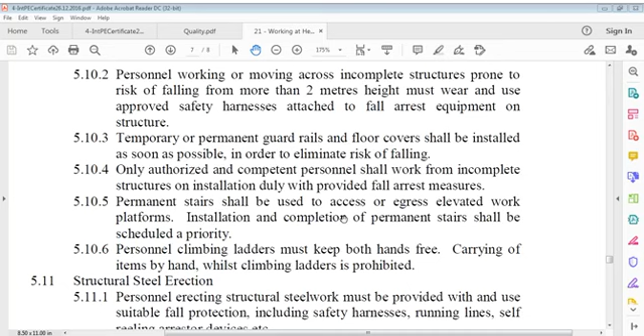Permanent stairs shall be used to access or egress elevated work platforms. Installation and completion of permanent stairs shall be scheduled as a priority.

Personnel climbing ladders must keep both hands free. Carrying of items by hand while climbing ladders is prohibited. Structural steel erection.

Personnel erecting structural steel work must be provided with and use suitable fall protection, including safety harnesses, running lines, self-reeling arrestor devices. Climbing of columns and walking on structural steel work members is prohibited. Straddling steel work is permitted, providing adequate fall protection is utilized during this operation.

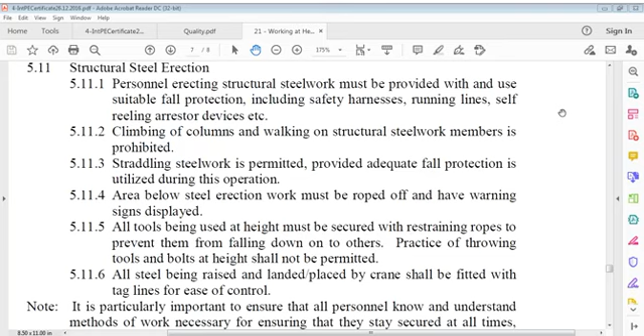Area below steel erection work must be roped off and have warning signs displayed. All tools being used at height must be secured with restraining ropes to prevent them from falling down on others. Practice of throwing tools and bolts at height shall not be permitted.

All steel being raised and landed, placed by crane, shall be fitted with tag lines for ease of control. It is particularly important to ensure that all personnel know and understand methods of work necessary for ensuring that they stay secured all the time.

When working at height, numerous fatalities have occurred through personnel unclipping or unsecuring themselves to access their work location. Adverse results due to such activity without use of harness have been observed, leading to hazards. Consequences must be emphasized and explained during activity briefing and training sessions.

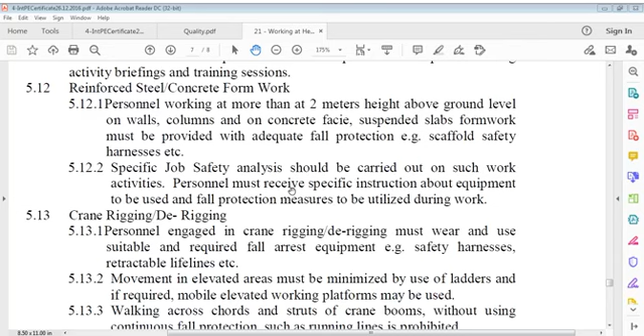Reinforced steel concrete formwork: personnel working at more than 2 meters height above ground level on walls, columns, concrete fascia, and suspended slabs formwork must be provided with adequate fall protection, namely scaffold, safety harnesses, etc. Specific job safety analysis should be carried out on such work activities. Personnel must receive specific instruction about equipment to be used and fall protection measures to be utilized during work.

Crane rigging, de-rigging. Personnel engaged in the crane... Specific job safety analysis should be carried out on such activities. Personnel must receive specific instructions about equipment to be used and fall protection measures to be utilized during work.

Crane rigging, de-rigging: personnel engaged in crane rigging, de-rigging must wear and use suitable and required fall arrest equipment, namely safety harnesses, retractable lifelines. Movement in elevated areas must be minimized by use of ladders and, if required, mobile elevated work platforms may be used. Walking across chords and struts of crane booms without using continuous fall protection, such as running lines, is prohibited.

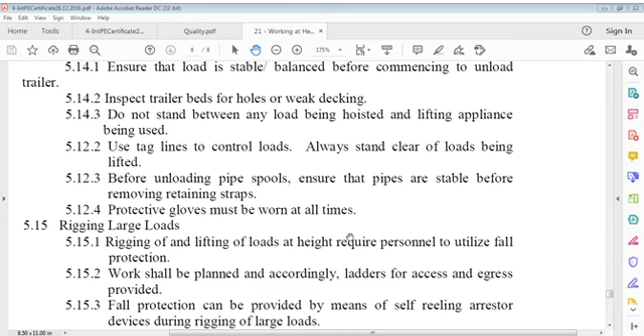Before unloading pipe spools, ensure that pipes are stable before removing retaining straps. Protective gloves must be worn at all times.

Rigging with large loads: rigging of and lifting of loads at height require personnel to utilize fall protection. Fall protection can be provided by means of self-reeling arrestor devices during rigging of large loads. Use of mobile elevated work platform can...

Rigging of and lifting loads at height require personnel to utilize fall protection. Work should be planned accordingly, with ladders for access and egress provided. Fall protection can be provided by means of self-reeling arrestor devices during rigging of large loads. Use of mobile elevated work platforms can reduce risk of fall during rigging operations.

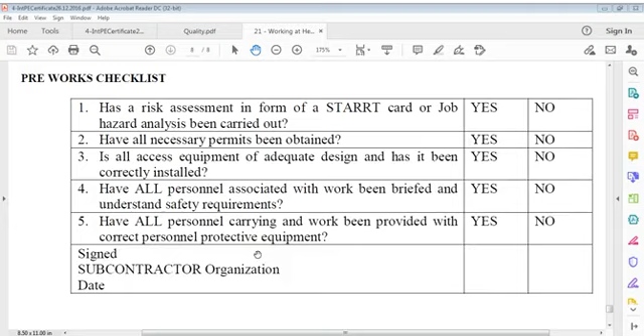References: now, pre-work checklist, that's important, is pre-work checklist, that's a very important point. I think a few points only we have to see. Has a risk assessment in form of a STARRT card or job hazard assessment or analysis been carried out? We have to make sure.

Have all necessary permits been obtained? We have to make sure. Is all access equipment of adequate design and has it been correctly installed? Access equipment, whatever, how have all personnel associated with work been briefed and understand safety requirements?

So we can say, is all access equipment of adequate design and has it been correctly installed? You have to make sure. Have all personnel associated with work been briefed and understand safety requirements? Have all personnel carrying out work been provided with correct personal protective equipment? These are certain questions that must be answered before starting.

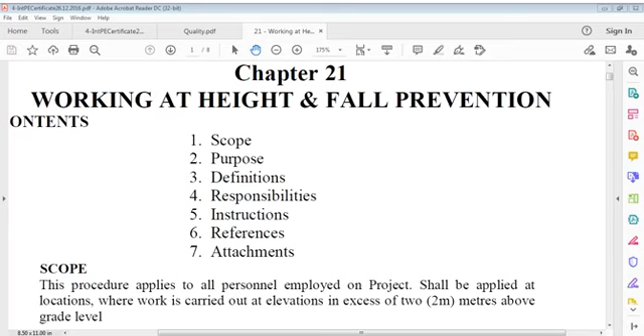And I think now time is to close. I think basically now close this better because of so many reasons. Not this one. It's not this one. It's here. So it's time to...